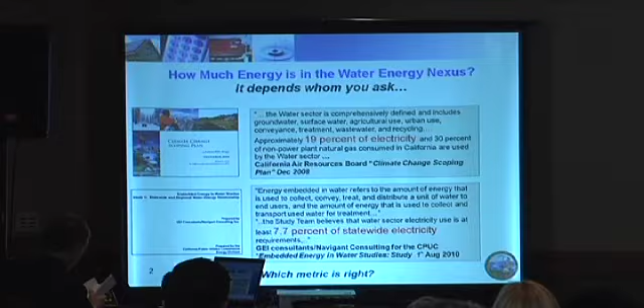So now going into my slide presentation, slide number 2 highlights the two definitions of the nexus. A nexus simply is a connection between the systems, the water and energy. Nexus obviously includes water and energy, but what's included in the water and what's included in energy and what's in the nexus is sometimes a little fuzzy. On the water side of the nexus, there are at least two basic components: the water industry sector and the water-related end uses. The water sector includes processes that collect, convey, treat, and distribute a unit of water to end users, as well as processes used to collect and transport used water for treatment prior to safe discharge.

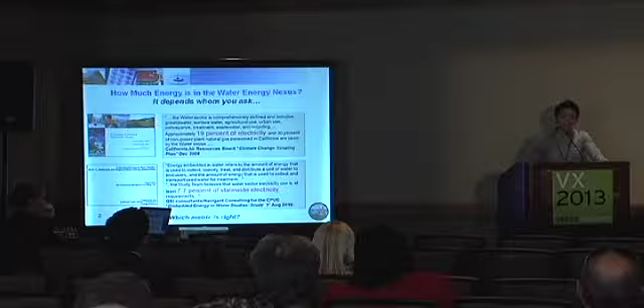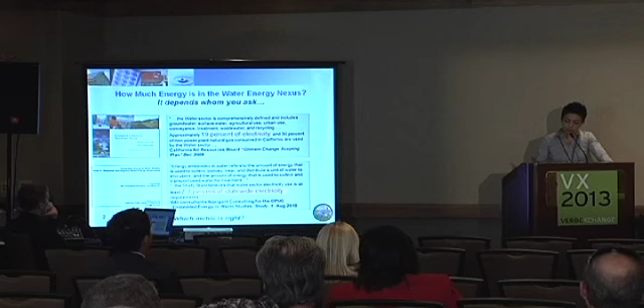This essentially reflects the energy used to supply and dispose of cold water to an end user. This energy is referred to as embedded energy in water. There are also energy impacts that result from the use of water in residential, commercial, and agricultural settings. These uses can also add energy to water, typically through heating of hot water or pressurization of water for other uses. This essentially reflects a demand for energy-enhanced water.

And as you can see in this slide, there are two definitions of the nexus. The first one is from the California Air Resources Board, the Climate Change Scoping Plan, which defines the energy-water nexus broadly as both the embedded energy as well as the energy-enhanced water. And it concludes that 19% of electricity in California is used for water-related services.

While a study done in 2010 on behalf of the California Public Utilities Commission by GEI and Navigant Consulting uses a narrower definition for the nexus, and they're suggesting that the nexus is just the embedded energy in water. And that's 7.7% of the electricity used in California. So the first definition includes the 7.7%, but it's much broader. It also includes the end users.

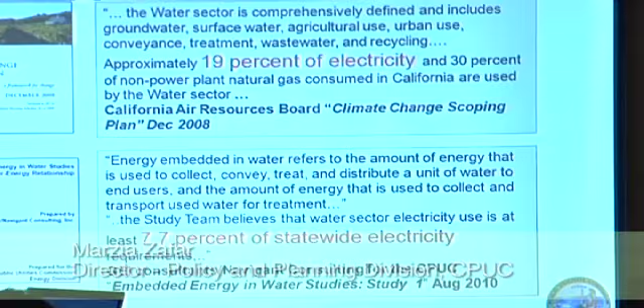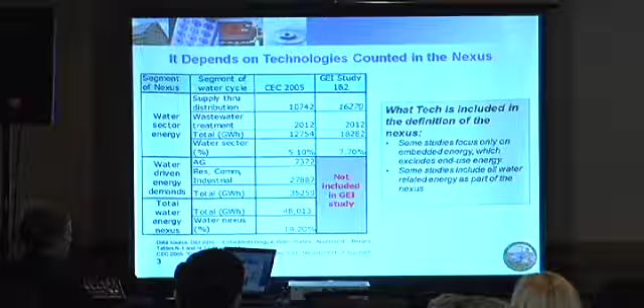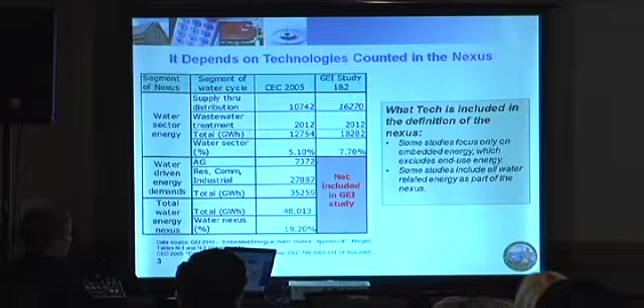Going to slide number 3, this gives you a little more detail into the two studies. The first is the CEC study, and as you can see, it tells you that it includes the water sector energy in the top half and the water-driven energy demands in the bottom half. And the GEI study only has the water sector energy. So whichever technology is included makes up that definition. And I think our paper and my presentation is suggesting that we should come up with a uniform definition, whichever it is, just to clarify for us.

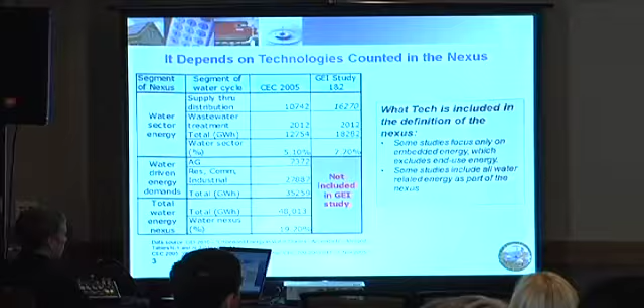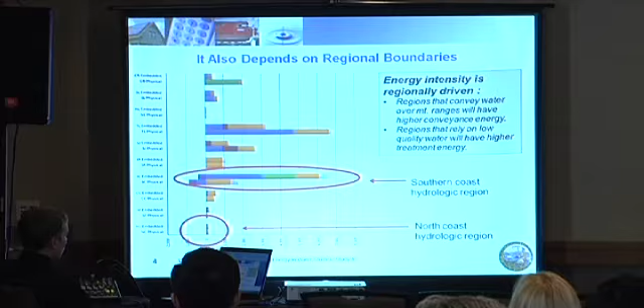Going into slide number 4, the main point I want to make in this slide is that energy intensity is regionally based. This table charts the regional energy used in the supply and conveyance segment of the water sector. In this one corner of the nexus, as you can see, there's a high degree of energy variability. This variability is not an indicator of efficient versus inefficient systems. Rather, it is an indicator of geography and water scarcity.

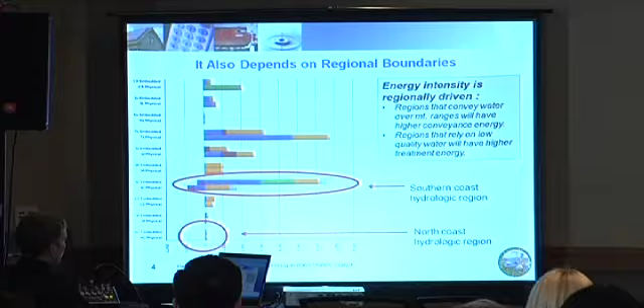In the southern regions of the state, where water is more scarce, supplying water is highly energy intensive because a significant amount of water is pumped nearly 2,000 feet over the Tehachapi Mountains. In the northern part of the state, where there is less reliance on long-distance conveyance or where gravity feed systems exist, energy intensity is significantly lower, as you can see, and almost negligible in comparison to the south part of the state. The other main point is that the chart does not tell you if the water sector is energy efficient or inefficient. It really shows how variable energy intensity of the California water supply is. And it also tells you that water is scarce.

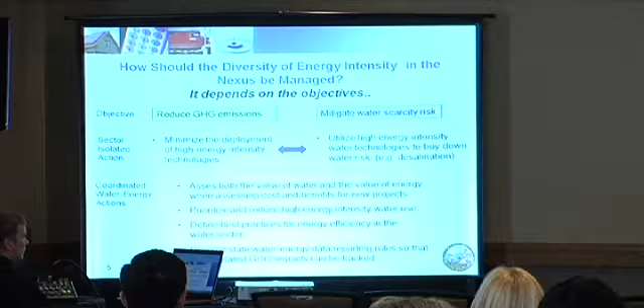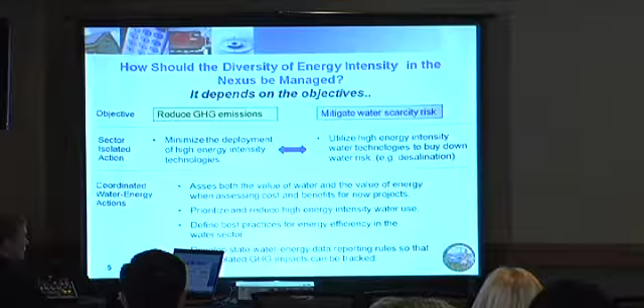And then my final slide number 5: how should we balance the statewide GHG reduction goals with the water scarcity risk that is faced in many parts of the state? As we have seen, one way to manage water scarcity is with energy-intensive technologies such as pumping. As we move forward, other energy-intensive technologies have also been suggested as ways to mitigate water scarcity, such as desalination. But these technologies may not be aligned with the GHG reduction goals because of how intensive their need for energy is. So what should we do?

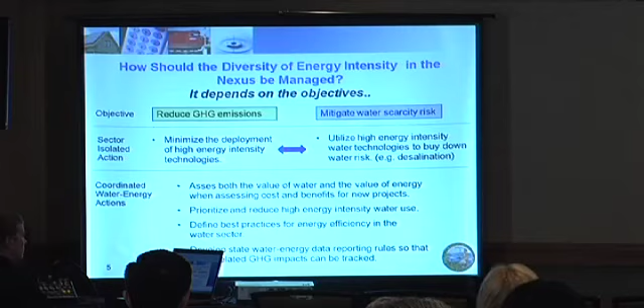There are easy wins: reduce water use through water conservation and water efficiency, but how do we pay for that? Which sector pays for that? And what's cost effective for both sectors? So far, a key challenge has been developing a model that accounts for both energy and water savings as opposed to just energy savings or just water savings. While this is an issue of the institutional legacy, there's a fundamental problem of valuing water. Quite simply, there's not a well-established process for valuing water. We also need to clearly recognize that regional access to water is a fundamental goal as well.

So while certain regions may be inherently more energy intensive, they should follow best practices for that region. And the best practices in a water-rich region by nature will be different than those in the other regions. Finally, the general principle here applies. We can't change what we don't measure.

And so the paper we issued recommended four coordinated water energy actions, and this is what WETCAT has also been working on. And the 4 recommendations are to assess both the value of water and the value of energy when assessing costs and benefits for new projects, reduce high energy intensity water use, define best practices of energy efficiency in the water sector, and develop state water energy data reporting rules so that water-related GHG impacts can be tracked.

And just finally, going back to the beginning of my presentation, to us, when we issued this paper, we wanted to make the point that first we have to come up with an agreed-upon definition for the Nexus. Is it the 19% of electricity consumed in California, which includes embedded energy as well as end-use energy, or is it the 7.7%, which is just the embedded energy?

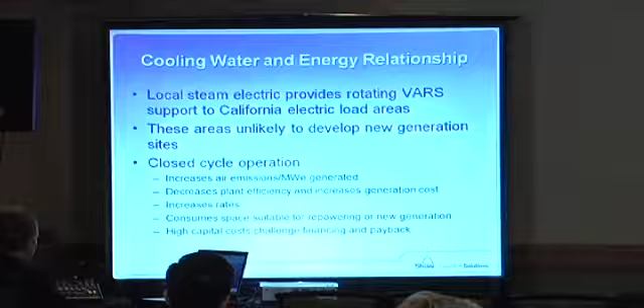I want to talk about steam electric energy and water use associated with that. One of the things that you have in any urban area is you have steam electric generating plants or combustion turbines that provide rotating VARs, that provide support to the electric system. It provides a component of reliability to your system that, although we'd all like to see renewables provide 100% of our electricity, it's probably not going to work.

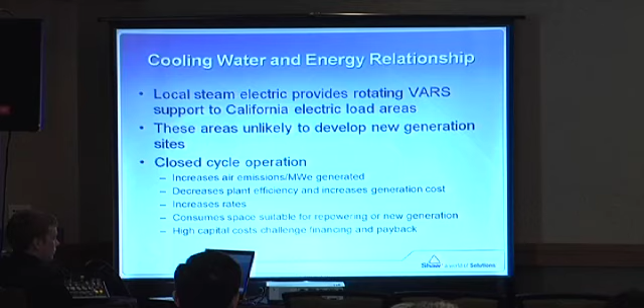And as you see, some utilities that have taken down their steam electric plants, including some old coal plants in Chicago, actually convert those plants to what they call synchronous condensers, where they are able to put rotating VARs back in. No matter what the supply of electricity is to that plant, they're able to do that. And you really need this in any large urban area like the Los Angeles basin.

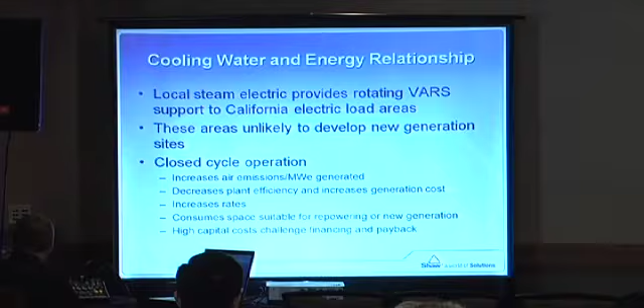And the other issue is that it's unlikely that in an urban area like Los Angeles you're going to actually develop new sites for major power plants that are fueled by natural gas or any other technology. People just don't want them, and it's very difficult to put them in there, but that's where they're really needed.

When you go to closed cycle operation for these plants, for steam electric generating plants, you do some things that are counterintuitive to what you might really want to see. You're going to increase the amount of air emissions for every megawatt of electricity generated. If a plant has any one of these three types of cooling system, you're going to decrease the plant efficiency with an increase in generation cost and cost to the ratepayers. And you're going to consume a lot of space when you do that.

There are basically three different types of steam electric generating cooling systems for the condenser side, for the steam turbine side. And these are once-through cooling, and California has a policy for once-through cooling where we're trying to reduce and eliminate once-through cooling for the protection of the biota, the aquatic critters. The others you have are wet cooling towers and dry cooling towers. I'll quickly go through these.

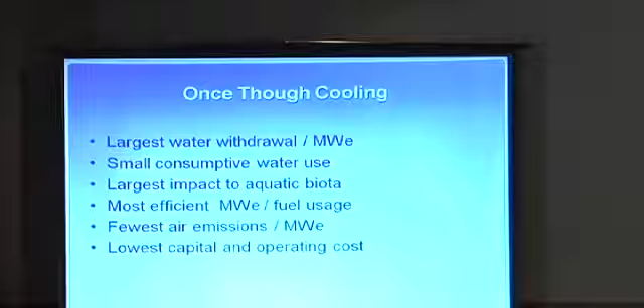Once-through cooling has the largest amount of water that it withdraws. It also has less consumptive use than a wet cooling tower. A wet cooling tower basically cools entirely evaporatively, so it drives off more of that water compared to once-through cooling. Once-through cooling has the largest impact to the aquatic biota by at least a factor of 10 in terms of critters that are drawn in. It is the most efficient for any amount of fuel that you put in.

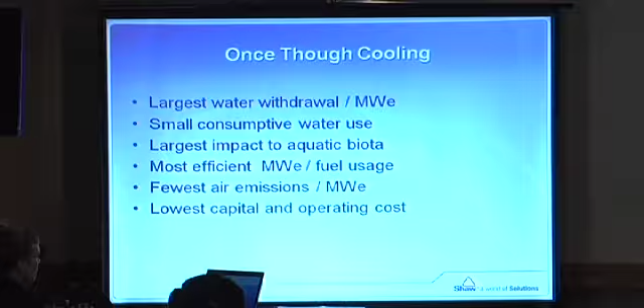For a simple cycle plant, on that steam turbine side, you're going to get more energy out for the same quantity of fuel. It also has the fewest air emissions of the three technologies to cool a steam electric plant. And it has the lowest capital and operating costs because it's just one cooling system.

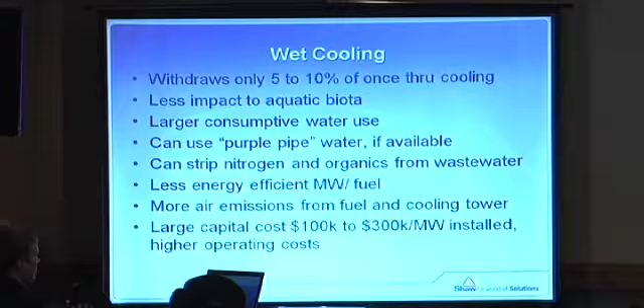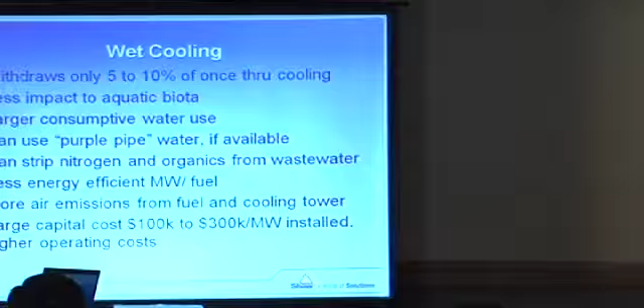It can also use purple pipe water, and there's a plant in the planning stages south of Miami that's 2,200 megawatts, and it will use all purple pipe water from the city of Miami to provide cooling in its cooling towers. And the other thing that the cooling towers can do is, if there's still nitrogen or organics in that wastewater, it can actually strip that. Of course, it's stripping it to atmosphere, so you're going to create another source of pollution, but it doesn't require the same level of purification as you would for a drinking water source.

The wet cooling tower is less energy efficient than once-through cooling. It produces more air emissions in two ways. On one side it uses more fuel to make the same amount of electricity, and then the cooling tower also puts emissions into the air. It puts particulates in the air from the dissolved solids that are in that water that's used for the cooling. And it can also, like I said, put in nitrogen or organics as it strips those from whatever is in the source of water that you use for this.

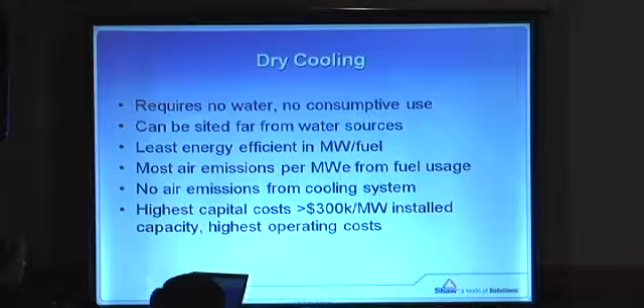Dry cooling requires no water for cooling. It still has a steam turbine, but it's cooled by air, condensing the steam from just fans in the air, and it can be sited far from available water sources. It's less energy efficient in terms of megawatt per fuel. It needs more fuel, especially on a warm, dry day. When the air temperatures go up, it's much harder. You've got to push more fans in to condense that steam.

It has the most air emissions per megawatt on the fuel side, but it has none of the air emissions a wet cooling tower would produce. It has very high capital costs. For the cooling system alone, it's well over $300,000 per megawatt electric of the steam turbine cycle that you produce.

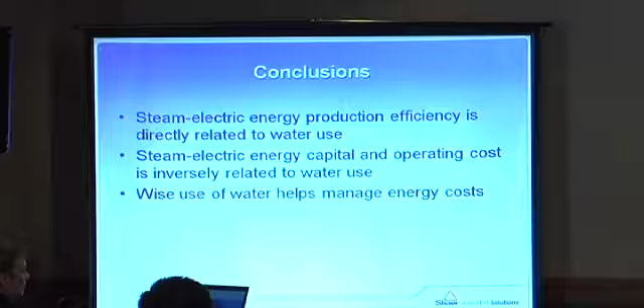In conclusion, steam electric energy production efficiency is directly related to water use. The more water available to cool your condenser, the more efficiently and the less capital cost you're going to have for that steam electric generating plant. Steam electric energy is capital and operating cost. The cost of steam electric is inversely related to the water use. So not only is efficiency different, but your actual cost to the ratepayer or to the point of delivery.

And I think the whole point is that depending on where you are and what's available for water, whether it's purple pipe water or storm water or whatever your source of water is for cooling a steam electric plant, you have to consider it wisely. If you're in an area where there's abundant water and you're not going to have impact to the local biota, once-through cooling, even though it's not the policy in California, is one of the more efficient ways and one of the ways you can reduce your air emissions.

So the main point I'm trying to make is there's a direct connection between water and energy production. You'll always have it, and you'll always need these kinds of sites that have either combined cycle or simple cycle steam electrics. And you ought to think wisely about how and where you get the water for these facilities.

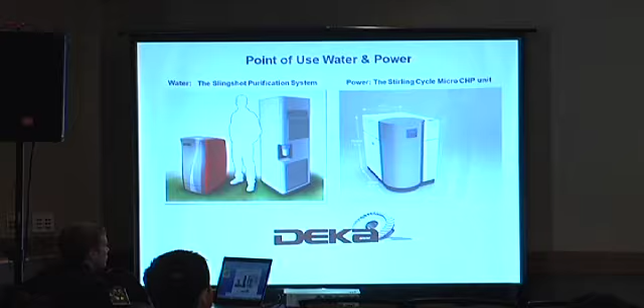And I work for an inventor named Dean Kamen, and these two technologies have been a big passion of his, not to solve California's problems, but instead to solve the water and power problems of the developing world. And there, the water scarcity and contamination issue in these remote regions is pretty obvious. But once you get there and start thinking about how to solve those problems, it always comes back to the need for electricity.

So what I am supposed to do is figure out how to commercialize these. I need to figure out if there's a way to make these technologies relevant for here so that we can ramp up production and bring the cost down so that we can take them over there somehow. I thought that was going to be a very difficult thing, but pretty soon you figure out that these are actually quite relevant technologies for the issues we face today. And these are actually very distributed. This is a different approach to infrastructure where instead you're trying to think about local sourcing and use of water and local sourcing and use of power.

So you say, crazy, why do we need that? We have great infrastructure in the United States. Well, I can say two things for you. One is Hurricane Sandy, and two is the Super Bowl.

No, just kidding. Anyway, I don't know if anyone saw that last night.

But as we can see, power supply issues are becoming a bigger deal with our existing infrastructure, and water supply too. And it really all clicked when I realized that these technologies that were designed to leapfrog places without infrastructure can actually leapfrog the places here with infrastructure. So what's neat is to think of the whole solution set, to keep expanding our minds of how we can be outside of the box to challenge these issues. We have great large centralized infrastructure such as any sort of generation plant, or any sort of large reservoir or huge water conveyance systems that bring livelihood to millions of Americans.